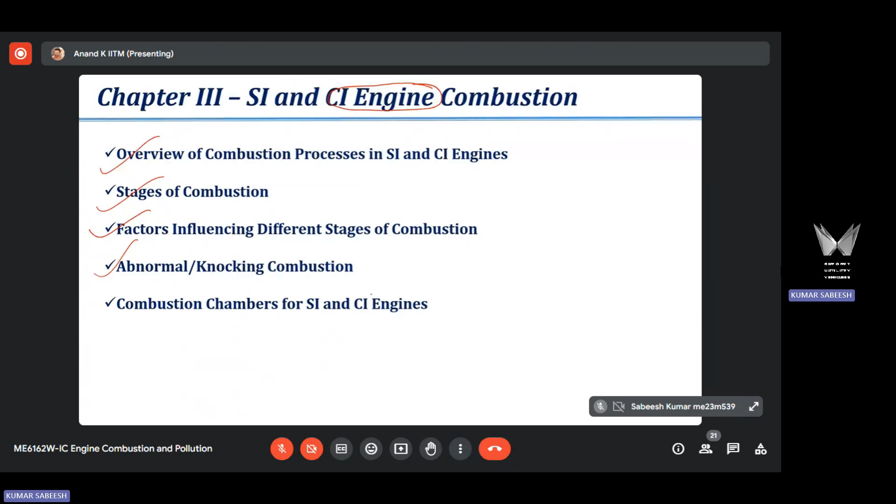Today I'm going to discuss the last topic in this chapter: combustion chambers for CI engine. We already discussed this for SI engine, now we'll discuss combustion chambers for CI engine. After that, I will discuss the assignment questions I have shared with you. I hope all of you have received them. I'll discuss those questions briefly—the idea is I will give you the solution procedure, note it down to answer those questions, and then you may have to submit it as an assignment.

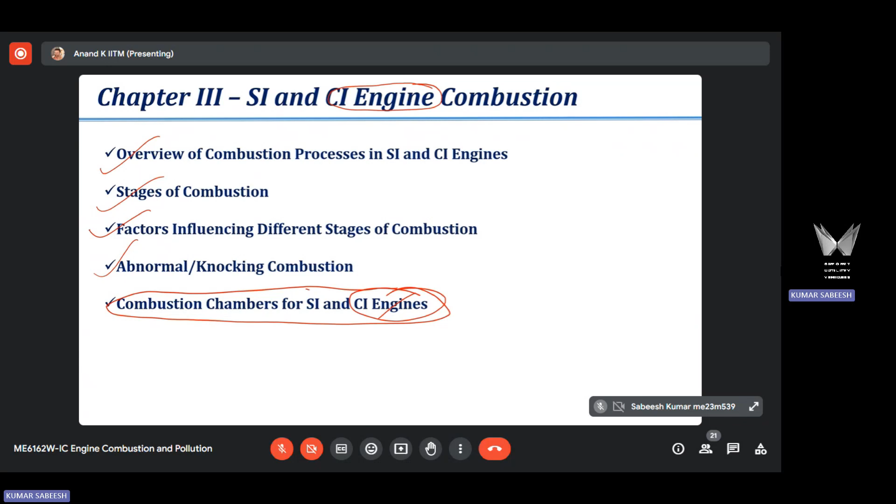So, combustion chambers for CI engine. One major consideration in SI engine, as we discussed, is that the combustion chamber design is based on three considerations: one is to get high power output, second to get high thermal efficiency, and third, we want smoother combustion without any knock.

All these are dependent on the combustion chamber design in SI engine. So when I say we design a combustion chamber, it involves the location of the intake and exhaust valve, location of spark plug, and also the shape of the cylinder head and piston. All this put together is the design aspect of the combustion chamber. So in SI engine we have three considerations: power output, thermal efficiency, and avoiding knock.

In CI engine, we have only one major consideration: we need to improve the rate of fuel-air mixing. We have to design the combustion chamber in such a way that it creates enhanced rate of fuel-air mixing. So why is mixing so important in CI engine compared to SI engine?

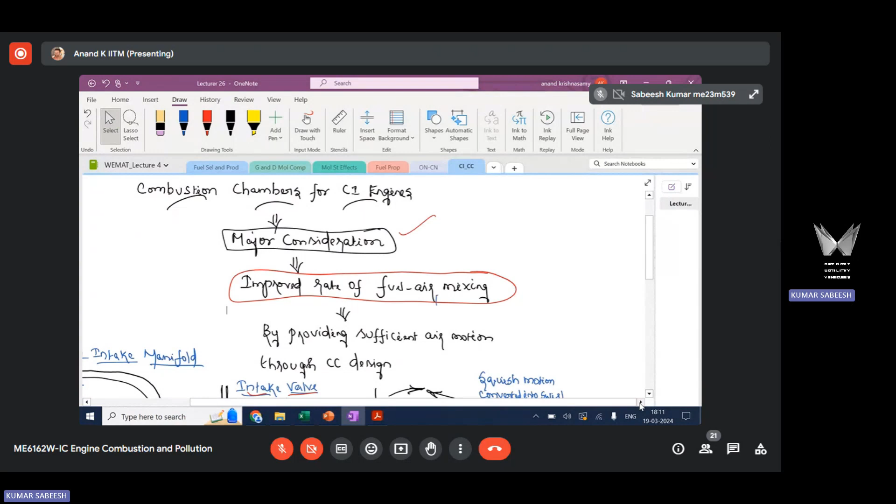We already discussed about that—if the mixing is not happening properly, if there is no motion around the flame, it might die. Because once the flame is generated, if the boundary is insulated in that way, then because of lack of oxygen the flame will not propagate fast, and if there is no movement around the flame, it might die. So the fuel mixing is a very important aspect of CI engine.

So when you inject the fuel, you have a spray profile. At the outer periphery of the spray you have drop formation, then air will enter in and mix—once the air enters, the liquid phase fuel gets into gas phase. Then you have pre-ignition, then ignition delay; once you have these, combustion gets started with radical formation. This generally happens around the periphery of the spray, or boundary of the spray.

If this is surrounded by air, and you don't have any air motion—suppose we assume the combustion chamber is quiescent, meaning without any air motion—then what will happen? There will be ignition around the spray boundary. Since there is no air motion, the products of combustion will be located in this region around the spray boundary. Because of this, the access to air gets stopped. So you have a core region with fuel drops or fuel films available, and they don't have access to air. This is called a choked condition.

Combustion gets started but cannot sustain—whatever ignition happens is going to get stopped after some time because it is surrounded by its own products. So what we expect is to create air motion so that the products of combustion move away from this zone and fresh air enters into the spray zone, so that the entire fuel gets access to air. Until the fuel gets access to air, it is not going to burn, because it has to be raised to the ignition limit. Until this happens, there is no combustion of the injected fuel. So it's very important to create air motion in a CI engine—that's why CI engine combustion is also called mixing limited combustion.

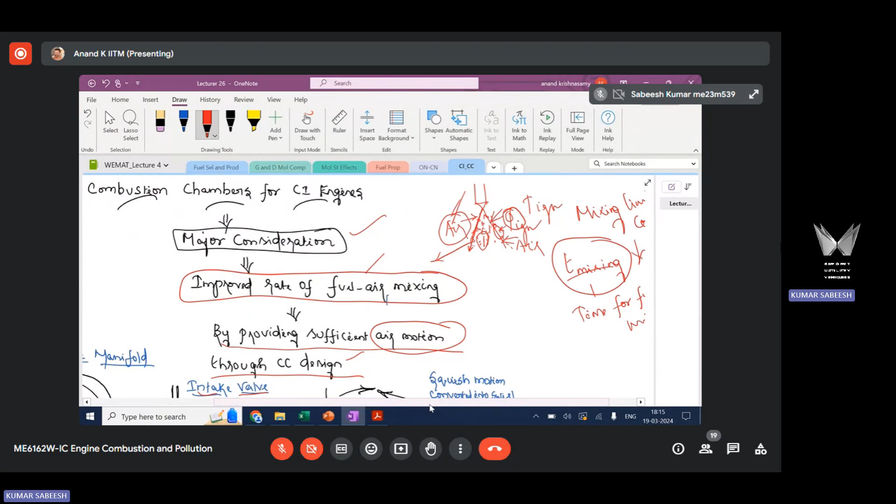So how do we create air motion? We already discussed about that - this is just a recap of what we discussed earlier. Air motion can be created during the intake stroke, which is a circular or rotational motion called swirl, as we have discussed. This swirl, a rotational motion, can be created by shaping the intake manifold. Instead of a straight manifold, if you have a helical manifold, you impart circular motion to the incoming air, so air enters the engine cylinder with a circular motion. This is what we call intake swirl, and it is based on the design of the intake manifold.

What is the limitation of this approach? Volumetric efficiency comes down. Yes - volumetric efficiency is going to drop in this case because of a high pressure drop with this kind of manifold design during the intake process. A high pressure drop will result in less mass entering the cylinder, so it will impact the volumetric efficiency. When mass inducted is less, power output will get reduced. This is a limitation of having a helical manifold from the perspective of increasing air motion.

One of the solutions is something called intake valve masking, shown in the second schematic. What is done here is, in the intake valve, there is a metal piece fixed around the circumference of the intake valve up to a certain direction. This is a sectional view, and you can see there is a circular metal piece fixed to the intake valve.

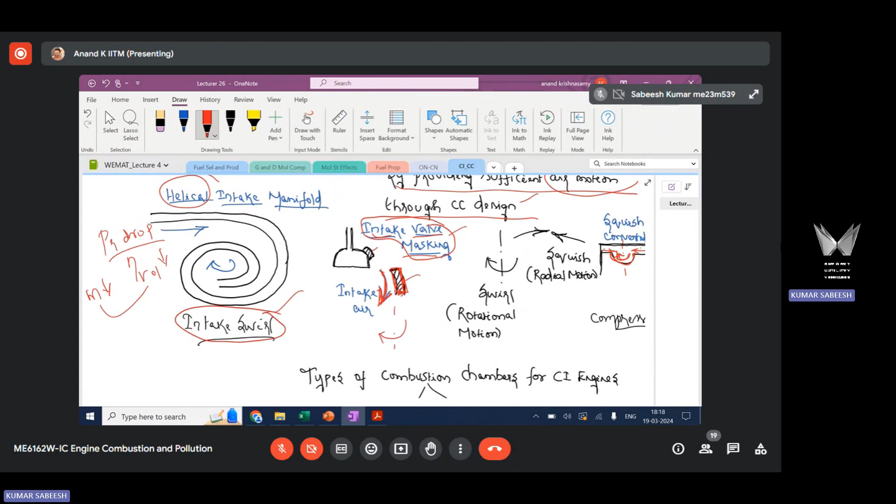So we are creating air swirl during the intake stroke by having this additional attachment in the intake valve. This avoids the pressure drop penalty we encounter with a helical manifold, by having this mask, but the intensity of the swirl will be relatively less here compared to the first case.

We can also create swirl and squish during the compression stroke, based on the shape of the piston and shape of the cylinder head. When the piston moves up during the compression stroke, the charge contained in this region will be squeezed or compressed to go inward. This motion is called squish motion.

The charge at the corners of the cylinder is forced to enter towards the center due to the piston's upward motion, forcing the charge from the corners to move towards the center. This is a radial motion or squish motion. When you have a flat piston, you will have only this squish.

But instead of a flat piston, if you have a bowl in the piston, this radial motion, once the charge from this end hits this corner, called the piston lip, undergoes a swirl. Similarly, the charge from this direction will hit here and undergo a swirling motion. So we are creating a rotational motion from the radial motion.

Both squish and swirl are generated based on the shape of the piston crown or piston top. Piston upward motion creates squish, and you can convert that squish into swirl by having a proper shape in the piston top or crown. This is done during the compression stroke.

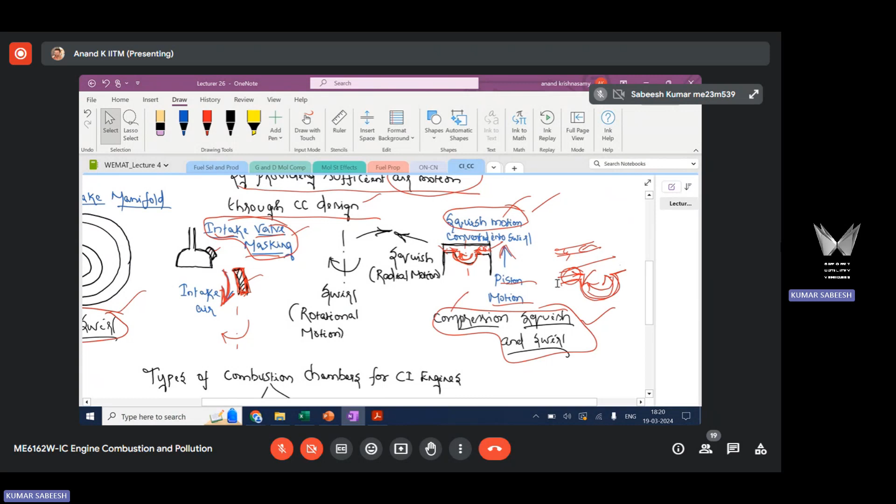So with this background information about the type of motions you can create by designing the intake manifold, valve, or piston, we are now going into the types of combustion chambers available for CI engines.

Basically, combustion chambers are of two categories. One is called the open chamber, the other is called the divided chamber. In the open chamber, the entire combustion chamber is located in the main cylinder. This is also called direct injection type diesel engine. The other one, divided chamber, is also called indirect injection type, or IDI type, CI engine.

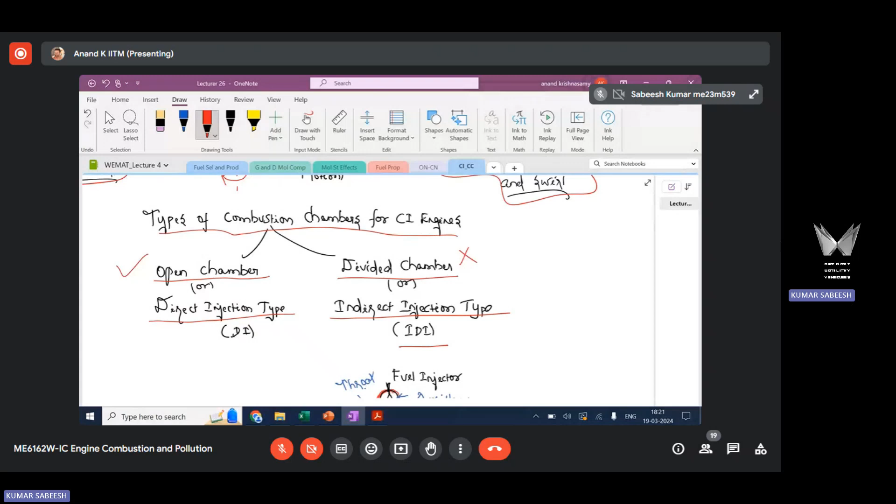This has become obsolete now. You don't see any IDI diesel engine running on the road. Earlier, this type of design was used for passenger cars. Diesel passenger cars were IDI type. Now we go with only the open type chamber. I will tell the reason behind this.

Before that, let us look into the features of these two designs. As I said, in the open chamber, the entire combustion chamber is located in one region, the main cylinder. So you have a piston of a different shape. This is the main cylinder or main chamber, so you have only one combustion chamber here.

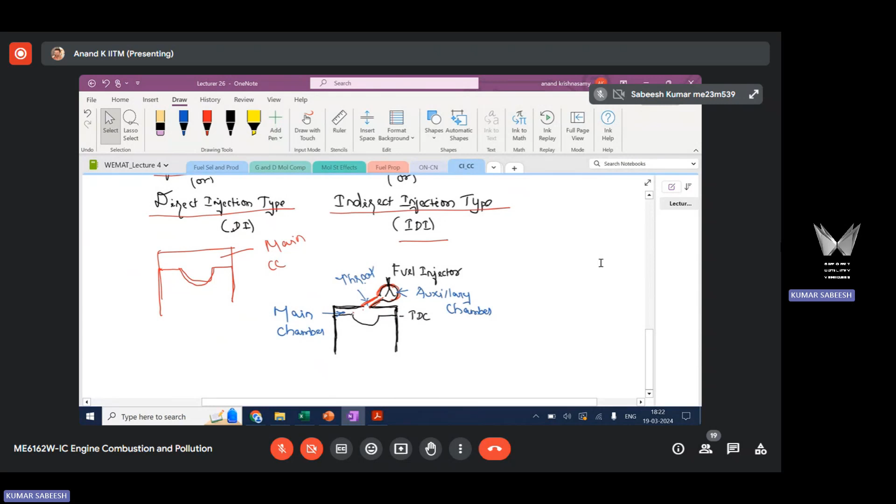Whereas in an IDI type or divided chamber type, there is a main chamber similar to the open type, but there is another chamber in the cylinder head. The head is connected with this chamber, called the auxiliary chamber, through a small throat, a nozzle-like passage that connects the main chamber and the auxiliary chamber. Part of the combustion chamber is in the main cylinder, called the main chamber, and another part is located in the cylinder head, referred to as the auxiliary chamber. Fuel injection happens only in the auxiliary chamber.

Now let us look at how this works. When the piston moves up, it compresses the air. At the end of compression, the energy levels in the cylinder are so high because of the very high compression effect that air will rush into the auxiliary chamber through this throat. The throat is like a nozzle, with a very small flow area. What will happen because of this?

Velocity will increase, in the auxiliary chamber, because you are forcing air with high energy through this throat, like a nozzle. You know what the function of a nozzle is: pressure energy will be converted into kinetic energy. So the air will leave at very high velocity at the exit of the throat and then enter the auxiliary chamber.

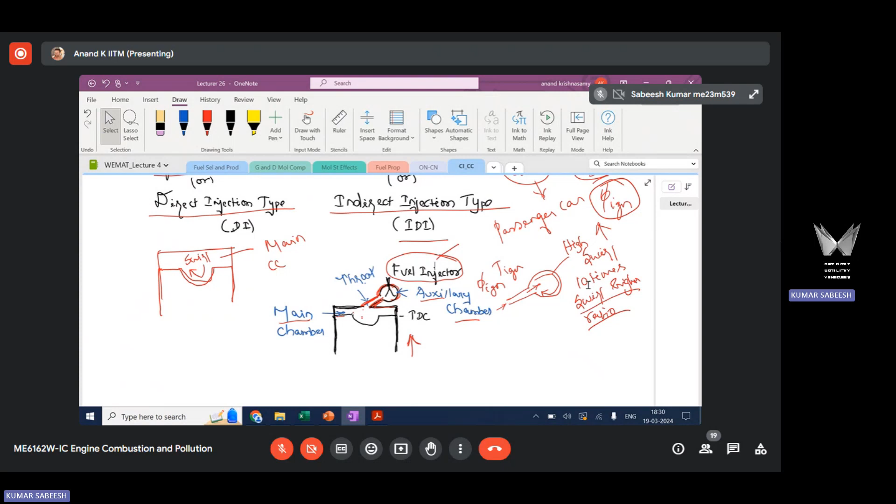When I say passenger car, you don't have any IDI design today - as an end user, what will you look at primarily? If you buy a passenger car, IDI type, it will be fuel consumption, more specifically mileage. So what will be the mileage in an IDI type engine - will it be higher or lower? Lower. Mileage will be lower, because losses will be more.

What losses? Because unlike direct injection, we are not getting complete forces transferred to the piston in the main chamber. This is because combustion happens in the next chamber, the auxiliary chamber, and then energy is transferred from the auxiliary chamber to the main chamber.

This is the core problem - there is poor mileage with the IDI engine. IDI engine cannot be compared with the DI engine in terms of mileage. Mileage is very poor. The major reason for poor mileage is high heat loss. Heat loss in the IDI engine is so high.

Why is it so high? For two reasons. One, surface to volume ratio - look at the auxiliary chamber, the surface to volume ratio is high, so there is more surface available for heat loss. Second, due to very high swirl, the heat transfer coefficient is high. Heat loss by convective mode is given by H times A times delta T, involving surface area and H.

This H is a function of fluid velocity. Since you are generating very high swirl, the H value is going to be high. This drives convective mode of heat transfer to the surrounding coolant. The auxiliary chamber is not insulated, remember, so it is going to radiate heat and lose heat by convective and radiative modes to the nearby coolant.

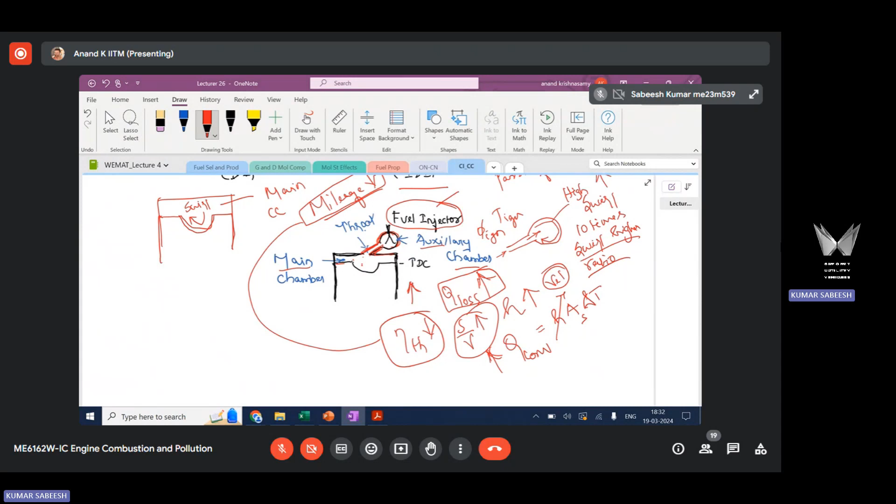Mileage is going to be poor - this is the reason why IDI engines have become obsolete. To run the engine at high RPM in passenger car applications, you have to create rapid mixing within very limited time, since engine running speed is high. So to enhance the rate of mixing, you create very high swirl, but because of that you get into another problem of high heat loss, which causes poor mileage. That's why these engines are discarded - there is no IDI type engine running on road today, primarily due to very poor mileage.

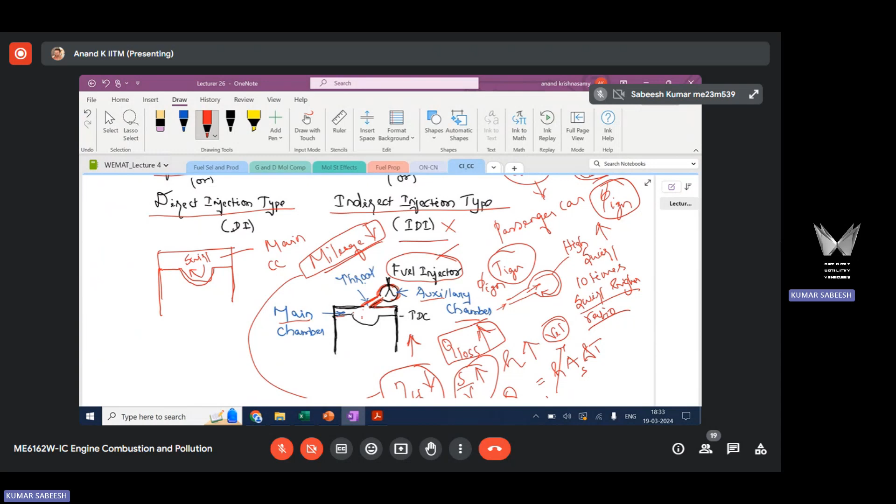In fact, you may have to use some starting aid like a glow plug to start this engine, because at the time of starting, since the heat loss is very high, you may not even be able to reach the self-ignition temperature. Heat loss is so high you cannot even start the engine, especially under cold weather conditions. That's why these engines are discarded, and we go with only direct injection type.

But diesel engines are used in passenger car applications even today, and we are running at high RPM with direct injection type diesel engines. Then my question to you is: how is this problem addressed?

You are not going to get a high air swirl as you get in an IDI engine. In a DI engine, the swirl levels are less. Then how do we create good mixing with a limited time?

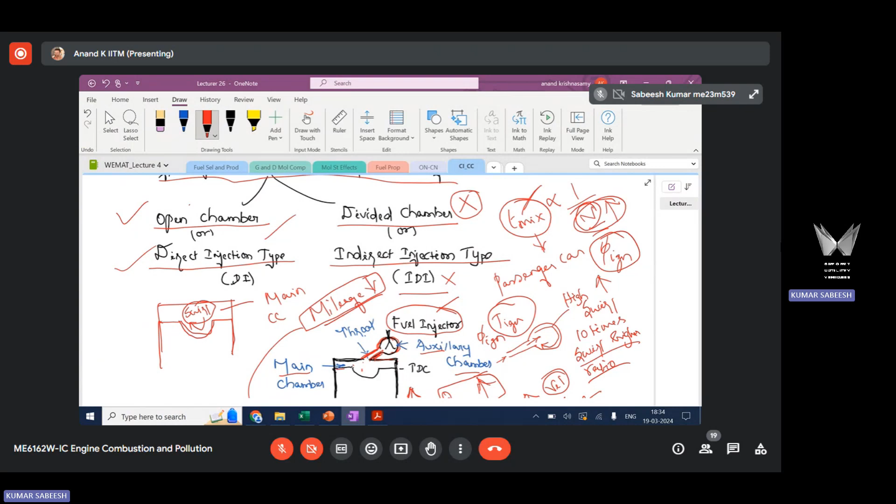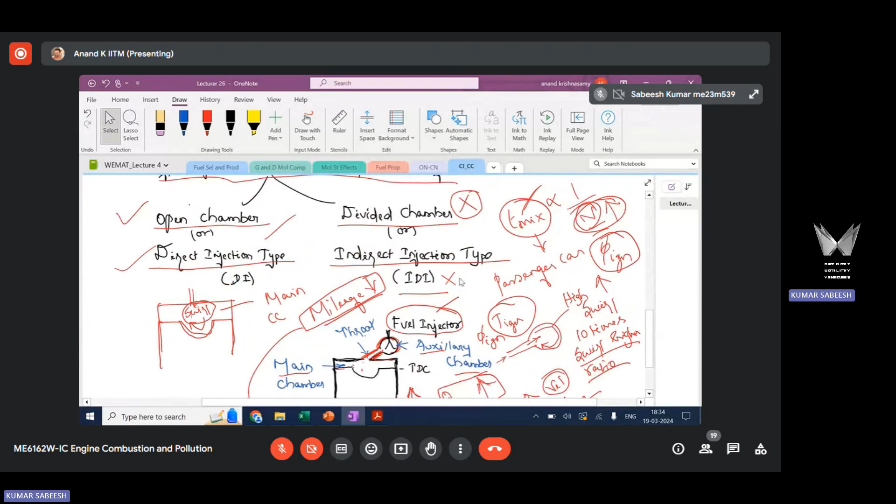Because of high injection pressure, sir. Exactly, because of high injection pressure. So these IDI engines were introduced at a time when you only had mechanical fuel injection systems. In a mechanical fuel injection system, the injection pressure is limited to 200 to 250 bar.

The fuel-air mixing is dependent on the relative velocity between fuel and air. You can increase relative velocity by increasing fuel velocity, air velocity, or both. Since you have a cap of 200 to 250 bar injection pressure, the velocity of the fuel is less. Fuel velocity is dependent on the fuel injection pressure. Since this is low, fuel velocity is low.

That's why you create a very high swirl to run the engine at high RPM. This is well taken care of in the current engine, because the current engine uses an electronic injection system.

In an electronic injection system, how much is the fuel injection pressure? Up to 3000 bar, sir, maximum. Yeah, 3000 bar also you can reach. It's highly flexible, you can vary anywhere between 300 bar to 3000 bar. So you can inject at very high pressure. Since you are injecting at very high pressure, the fuel velocity is high.

Although you have less air velocity and less air swirl, the injected fuel is at a higher pressure, so it is at higher velocity. This creates better fuel-air mixing, which is not possible with a mechanical system. With the mechanical system's upper cap, you had to create a very high swirl. This constraint is not there with a high pressure injection system. Although air swirl is less, fuel velocity is high, so mixing is better. That is how we take care of mixing within the limited time we have in passenger car applications.

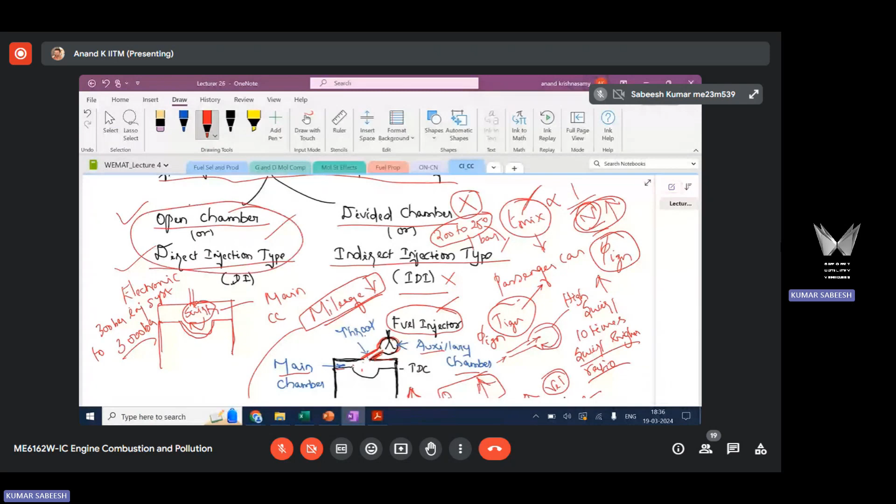That's why we use this design for better mileage. Since the air swirl is considerably low compared to an IDI engine, you get better mileage in this type of engine. Clear?

Now we are looking at possible combustion chamber designs. Four different types of combustion chambers are shown here based on how we shape the piston. In all these four designs, the cylinder head is flat, but the piston shape is different.

Just observe the shape of the piston. In the first case, you have something like this, similar to the letter omega. The cylinder head is flat in all cases. The piston crown is shaped like this - this is hemispherical design, this is shallow bowl design.

Deep toroidal bowl and shallow toroidal bowl. In a shallow toroidal bowl you also have a divided cavity - this is called divided cavity, and the other one is single cavity.

So what's the difference? The cylinder head is flat, but the piston top is of different shape to create air motion, which is our primary consideration in CI engine combustion chambers. You have to create air motion. What difference have you noticed with respect to air swirl in these four designs?

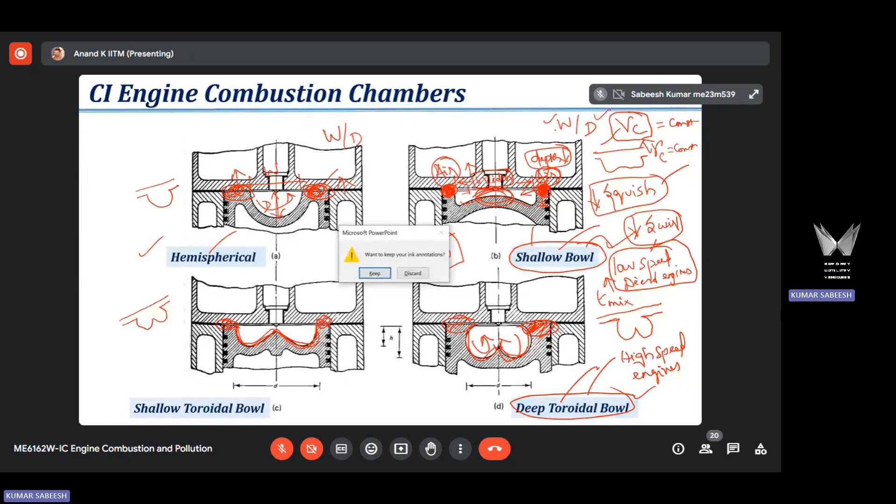Clear, sir. Audible. Okay. Sir, am I audible? Yeah, audible.

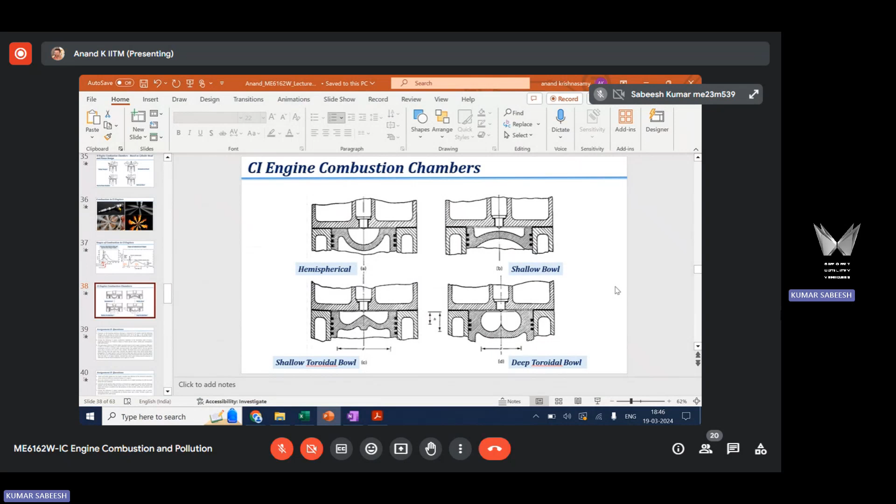Sir, can you just comment on the stress concentration aspects of these four different designs? Like at the edge of the piston crown, for the case of a shallow bowl, that stress concentration would be high, right? Because the area of flatland that is available is less. No, so you're talking about this area. Yes sir, exactly. Okay, so what is your point here? I felt that the thermal stresses at the edge would be more, and that is not preferable.

Yes, exactly. Because you also see that the surface here exposed to the hot combustion gases, the surface of the piston exposed to hot combustion gases, is high. So thermal stresses are going to be high with this shallow bowl design. Exactly, thermal stresses will be higher here compared to this design. The thermal stresses in the piston are based on how much of its surface is exposed to hot combustion gases. Surface to volume ratio again will play a role.

For two reasons: one, heat loss from the combustion chamber surface exposed to hot combustion gases. So the piston has to be heavier in a shallow bowl design in order to withstand these thermal stresses. Generally, this problem is addressed by increasing the material for the piston.

Just a counterintuitive point, sir. For example, in deep toroidal, that edge seems to be a pointed V kind of shape, right? No, it's generally rounded. The schematic looks like this, but generally they don't have any sharp corners. You should not have any sharp corners here, that is also going to result in pressure drop. Yeah, got it sir, clear.

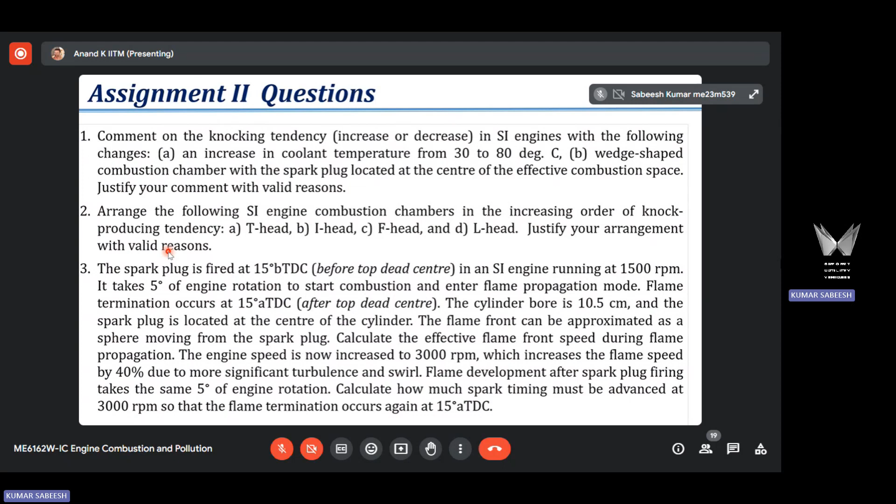First, you need to make the arrangement, and after making the arrangement, you have to justify your arrangement with valid reasons. Clear? So it's time up, I stop here. I will continue this in the next class. If you have any questions, you can ask now.

Professor, you have told that the squish value and swirl value are interlinked, right sir? If I'm not wrong, if the squish value is high, then swirl value will also be high. If the squish value is low, then swirl value will also be low.

But my point is, sir, if the combustion chamber is designed such that after entering, the gases gain a radial component of velocity, will that not be independent of the squish value? What I mean to say is I can have a lower squish value but still produce high swirl based on the angular momentum of the charge if I am able to impart that into the incoming charge.

No, actually you are not generating any energy here. Through the piston shape, you are converting one motion into another, radial motion into circular motion. It's just a change of motion, a directional change, but in terms of energy levels of the fluid, you are not generating any new energy. Whatever energy the fluid has, it continues with the same energy, only there is a directional change from radial to circular motion based on the shape of the piston. One thing that can happen is energy level may go down based on how you shape the piston.